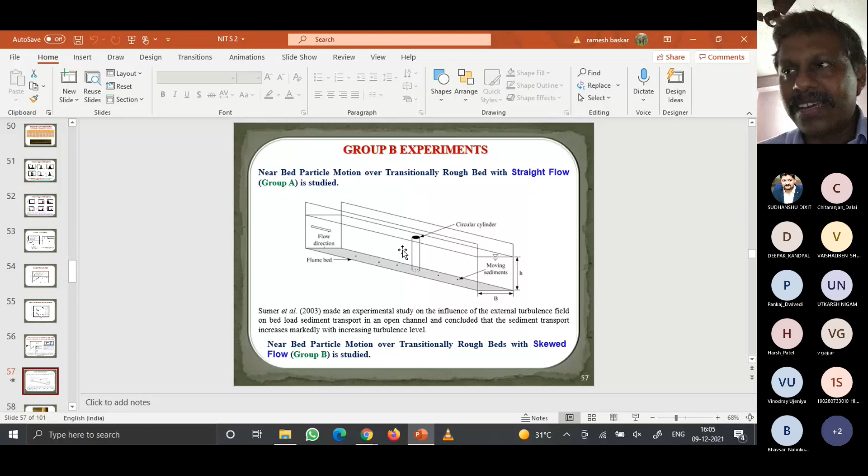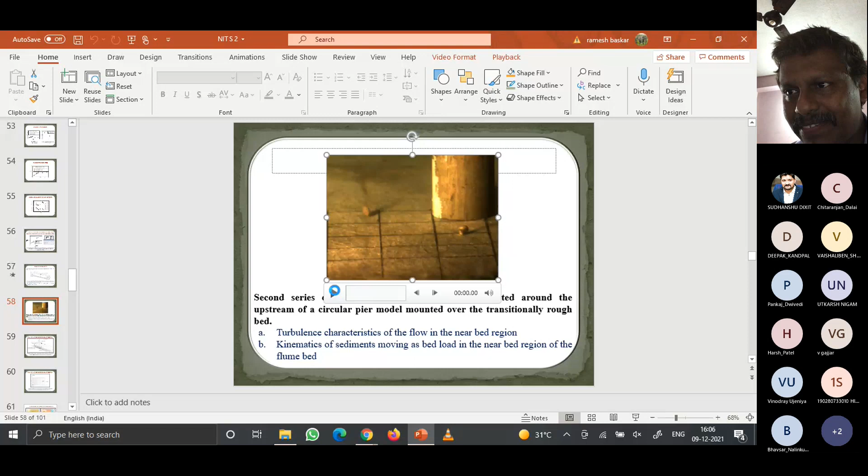So here, this external turbulence, what we did was we had a setup like this, just to show how it happens. Let me play this video. Will it run? Let's wait, and if it runs, okay, good.

Can you see that the particle is moving? Yes, sir, we can see that. Very good. So that was the motion.

You can see here the particle comes with some velocity. Maybe you will not appreciate it, there's a lot of buffering there. Otherwise, you could see that the particle comes with a velocity, and when it comes closer to the pier, the velocity increases tremendously, and it moves with much faster velocity.

That was basically what our studies were all about. So what we did was, around this pier, we tried to understand and quantify the turbulence that was generated because of this external object in between the flow. And that turbulence we tried to relate with the sediment motion, like what we did previously.

But when you come to this study, two-dimensional analysis will no longer work, and you'll see that once we go through the flow, you'll understand what we did.

Okay, so this was the setup we had. The diagram is like this: I have the flow, and in between I had a pier, and on the upstream side of the pier, all the flow that is changing there was measured. You could see a grid line there, which we put there and identified.

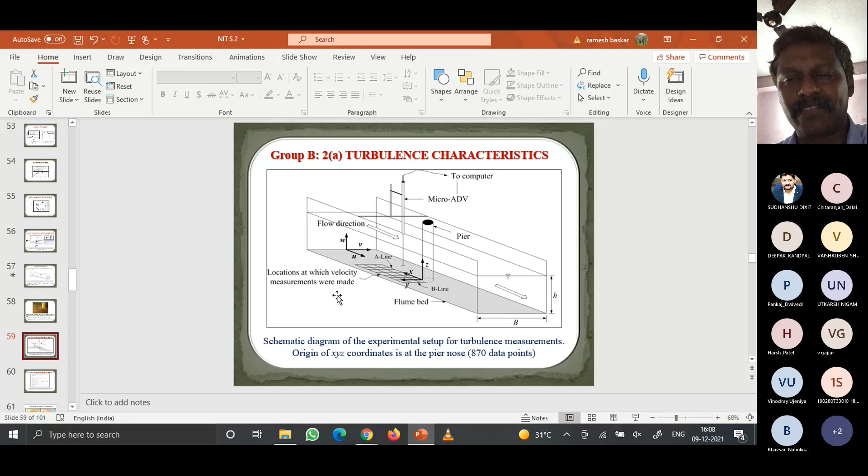And as usual, a camera was used to find out the sediment characteristics, and we try to relate both of that and get a relation. That was the objective of the study.

So you see, these many points we had. These were the points where the flow velocities were measured. You see, these many locations we had. All these points were the locations where we measured the flow.

And you can see here, our measurement points were very dense, very close to the pier. When you get away from the pier, we have increased the spacing, because we know that the effect of turbulence in the upstream side reduces when we go away from the pier.

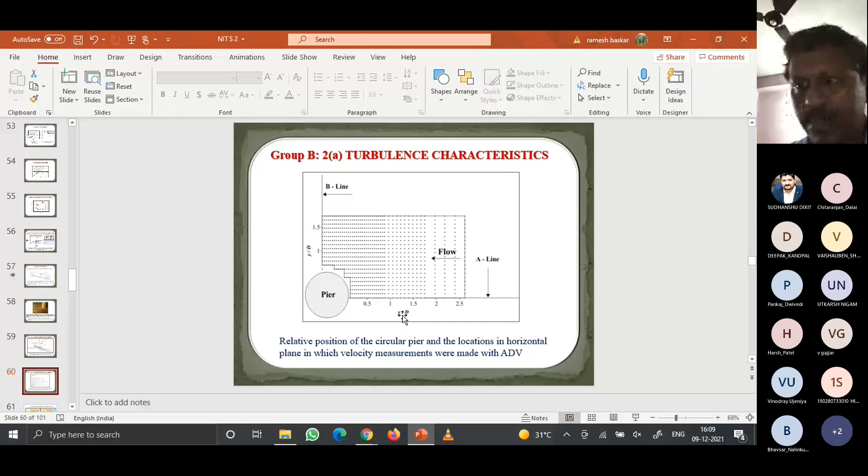So that is the reason, and these many points we have measured. At each and every point, 30 hertz was used and we got 7,200 data points. The complete data points were processed to understand a map like this. And we got a very interesting map here, and you could see how the flow velocity changes. Because of these many points, it was pretty easy for us to quantify where exactly the flow changes happen.

And you can see here the components of the velocity in x direction and y direction, and these u and v velocities were clearly captured. This is all from the ADV data what we got, and all that data was processed and used for preparing this contour map.

And these were the velocity changes, and you can see very close to the pier, these diagrams were not possible. The data is not given, it is blank. Why? Because that was the limitation of the ADV. We could not go closer to the pier more than that. That was the maximum possibility with the ADV what we had. We tried a lot of tilted orientations, and that was pretty decent data which we could get near the pier.

And you can see the velocity vector, how it comes and how it is getting diverted, and that is a very crucial area here, very close to the pier. It is very crucial, and we tried to understand that, but unfortunately very close to it we couldn't get data, but it was okay.

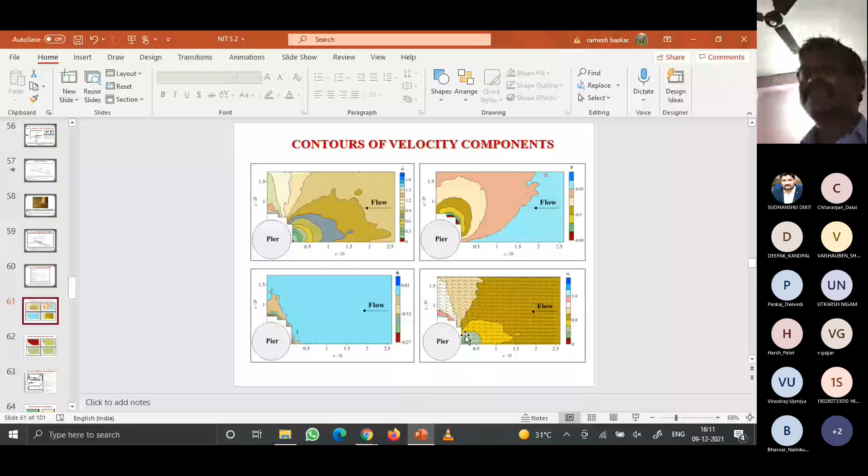And as we did previously, we measured the velocity values, and from the instantaneous velocity values, these turbulent intensities were found out. And you can see how the turbulent intensities vary close to the pier. And really, you don't have to bother about more than the size of the diameter of the pier. And that's what our previous literature also says, right?

And on the upstream side of the pier, you can see that it is not more than the diameter of the pier. It's less than that. All these effects will be felt within that. So whenever we have a study, we can have it just one time, or 1.5 times at most, because all these variations will happen within that.

And the flow along the symmetry line. What I mean is this mid point here. This is the line at which the flow gets diverted. So here, at the center line, the flow comes and hits here. That I call a symmetry line. And after that, the flow gets diverted to the right side and left side, right?

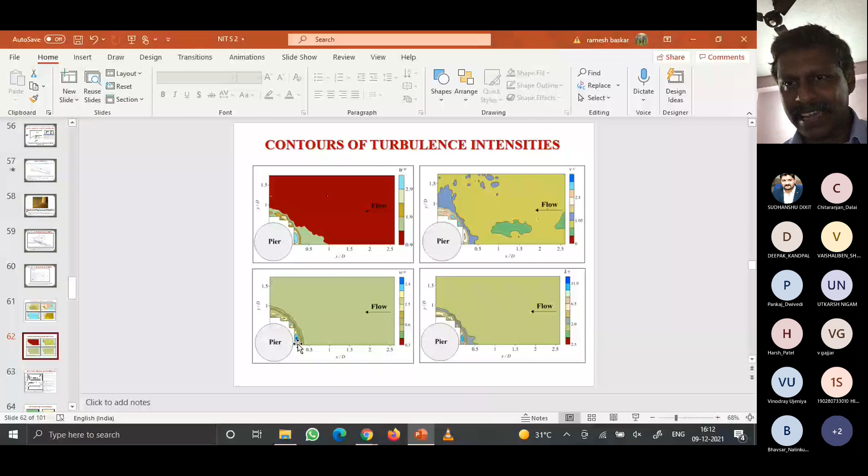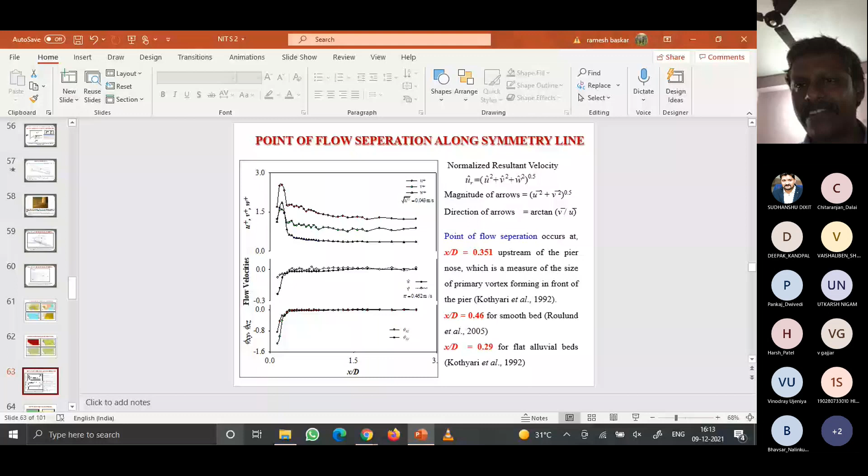And we have drawn this, and we can see how beautifully the flow is varying. You can see the turbulent intensities are very high closer to the pier, as expected. There's nothing particular about it, but it really quantified the maximum turbulence level very close to the pier, and how it drastically drops down. And with these values, we can draw the Reynolds stresses also, as computed previously.

The Reynolds stresses and all these variations you can see are pretty close to the pier only. We have all these turbulence effects there, and upstream you don't have much effect. So the point to be emphasized here is that all this turbulence really has an effect on the bed load. When this turbulence is not accounted for in our predictions or whatever formulas we use, then it may not give you the correct answer.

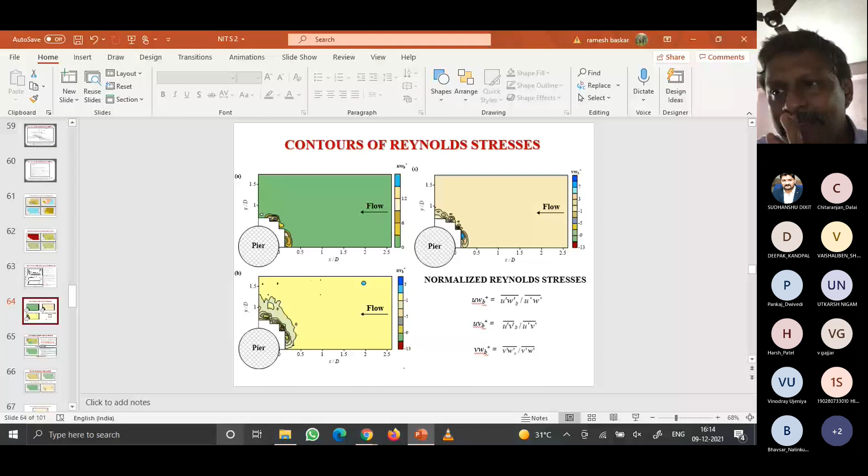So that's the quantification from this diagram, and you can see the variation of the bed shear stress. Two formulas which we very commonly use in the literature were also used to find out what the bed shear stress will be based on the values. These are all post-processed values, right? With these U and V values, all these things are post-processed, and we got a graph.

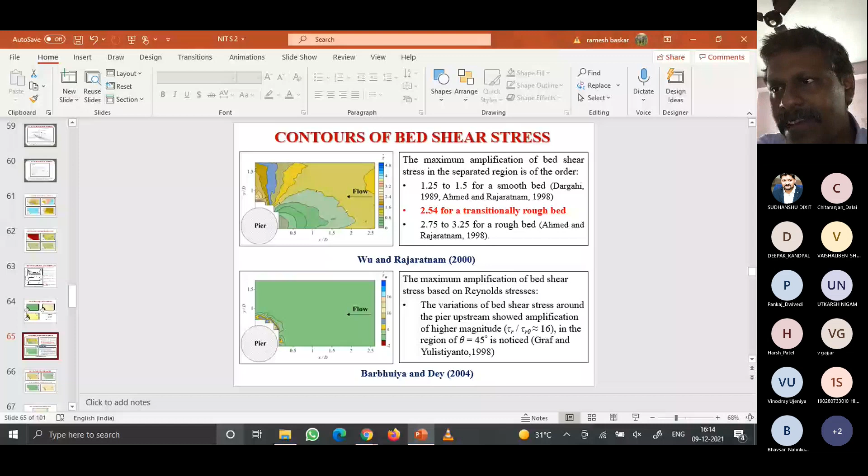So again, as usual in the straight flow, we got the diffusion factor. These are all the same as before: flatness factor, kurtosis, and we also had quadrant analysis. We got interesting diagrams, very close to the pier. It's all about U', V', and W', right? Those were used to do the quadrant analysis, and based on that, we saw that there's a lot happening close to the pier. We could quantify all the turbulence happening there to a reasonably good extent.

And after that, what happened? Hold on for a minute. Big images are coming up, so give me a minute. Hope you can see me. Can you see the slide? Yes, sir, we can see the slide. Thank you.

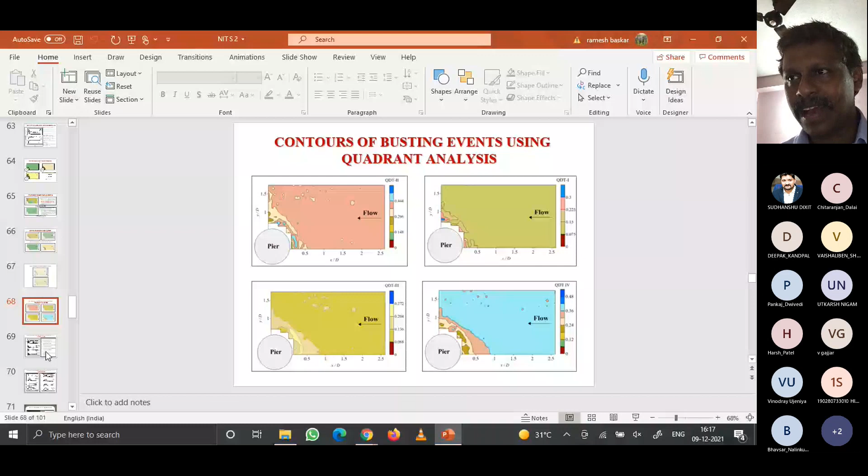So this was the quadrant analysis. Through the quadrant analysis we got the flatness factors and the kurtosis. All these parameters were computed very close, because they all try to define the turbulence. The turbulence we were trying to understand was computed along line A and line B. Line A is the symmetry line, exactly on the upstream side of the pier, and line B is across it, at 90 degrees, and we show the variation of all these parameters along these lines, because that was where we were focusing. When it gets away from the line, it dilutes down, so we tried to quantify it along that line.

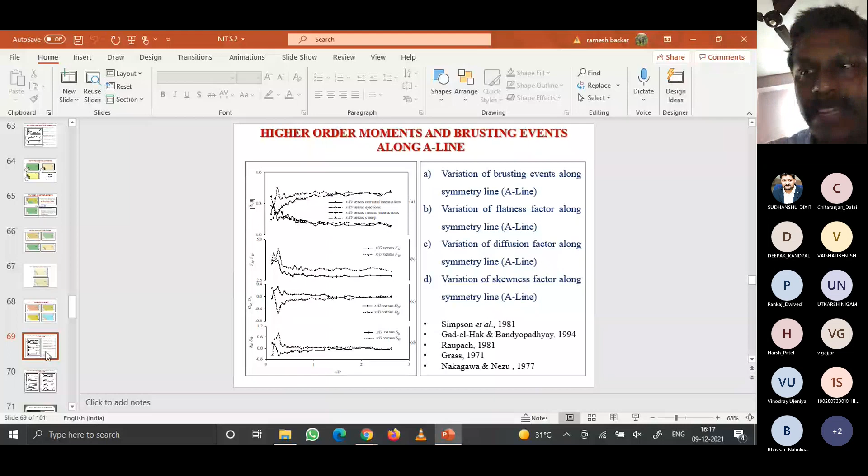And all these parameters shown in the contour maps, by post-processing the contour maps, we can get the velocities and other parameters at any point of interest. If you drop some points there, we can understand the flow parameters. Each and every point very close to the upstream side of the pier was mapped. So at any point, the turbulence event, the turbulent intensity, the kinematic viscosity, the turbulent kinetic energy can be found directly from these contour maps. Whatever we had on the upstream side of the pier was clearly quantified, and the data we got is very clear about the flow happening there.

Now we go to the camera part, that is, the image processing part. Here is an interesting setup we had for image capturing. Previously it was two-dimensional only; we had a camera only on the side of the flume, capturing the sediment motion from one side. But at the pier, it is no longer two-dimensional; three-dimensional effects also happen there, so we cannot capture it with one single camera. So we used two cameras: one capturing from the side, and the other from the top.

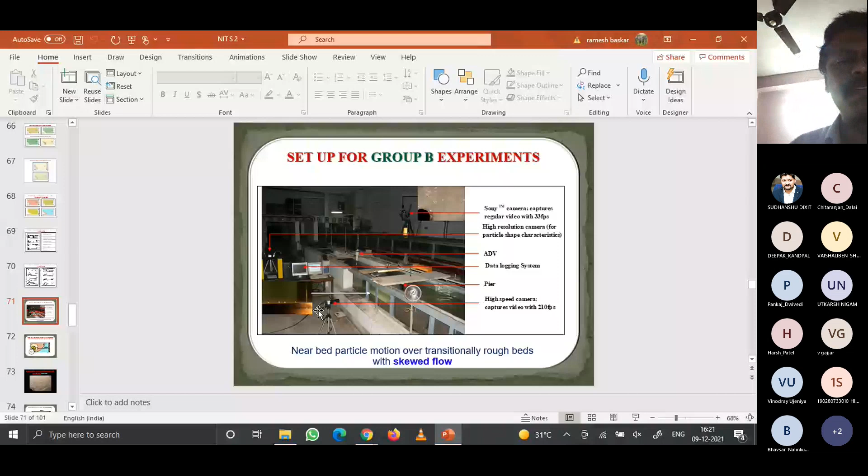It takes close to 33 frames per second. That is a regular camera. So that regular camera captures the sediment motion from the top. How a sediment moves, only that path can be tracked. It was manual tracking, so we did not have a high-speed camera on the top. So these two were the camera setups we had, and with that camera setup, we tried to track a particle.

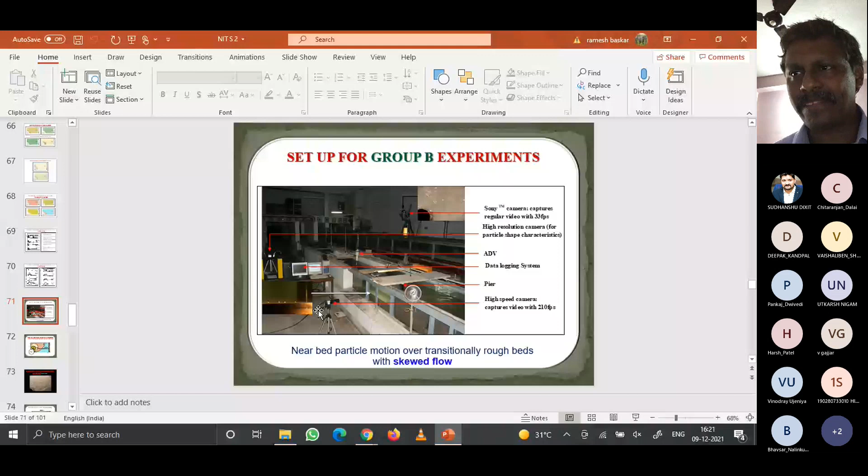You see, what we did here was, we know the complete flow profile, and I dropped a sediment on the upstream side. Well ahead, we dropped a sediment which was close to the symmetry line. It was not passing exactly the way I wanted, but it was going, right? So I dropped a particle on the upstream side, and the path of this particle was tracked using the data from the camera on the top, which clearly captured the track of the particle.

After that, this track was superimposed over the contour maps we had already drawn of all the turbulent characteristics. Then we got the data along this track: what were the turbulent characteristics. Now we have the velocity with which the sediment is moving, and exactly what the flow parameters were along this path.

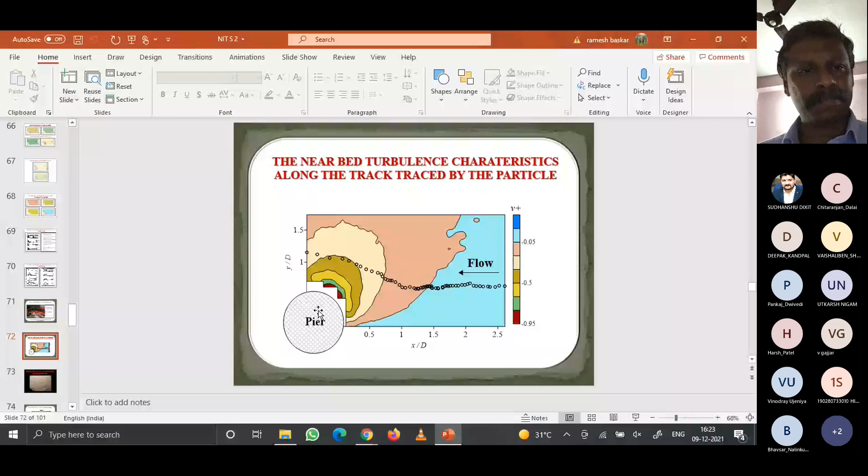Then we tried to relate both, to understand when the turbulence increases, how the velocity changes, right? This relation was clearly found out by this method. So we'll see how we did this. This image was taken from the top. Let us see whether it works.

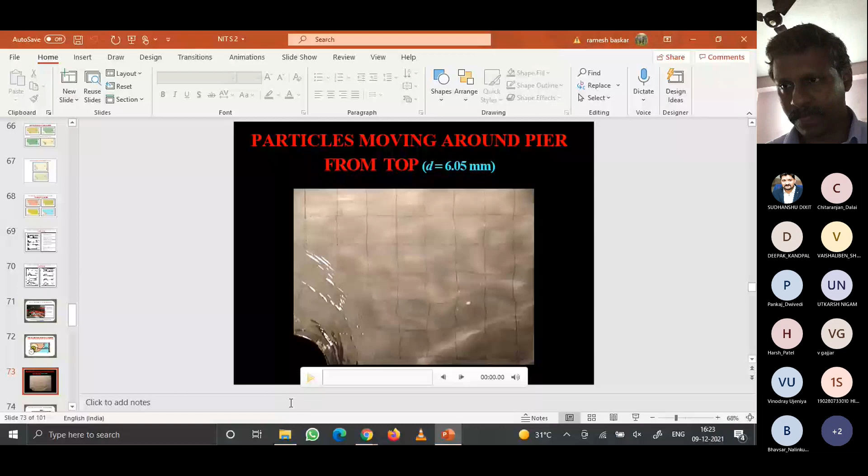It's working for me. Can you see that? Yes, sir. Yes, sir. Thank you, thank you. And you see this, these all

particles are moving. Can you see the colored particles moving? Yes, sir. Red, yellow. A little bit. How many colors do you see? Okay. I have used a variety of colors: blue, red, yellow. There is no specific hydraulic purpose behind that, and I have used 3 or 4 colors there.

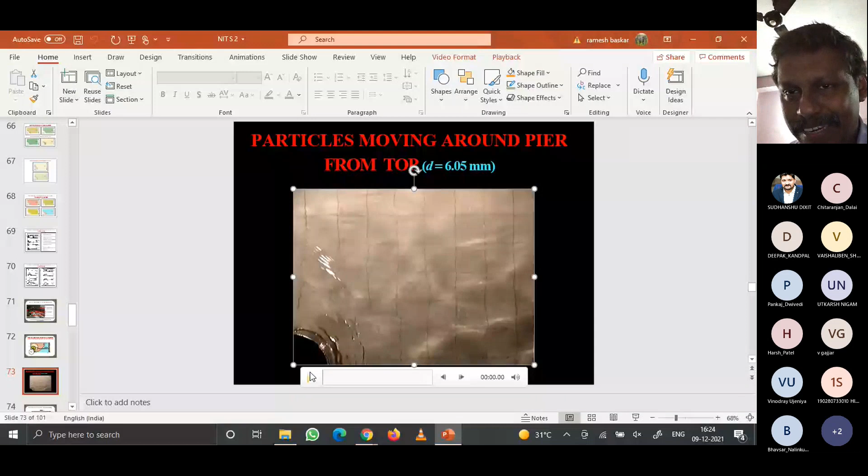Why I used this: when I drop a group of particles on the upstream side, I really want to know which particle I am tracking, because it's manual identification and tracking. So I was putting 4 or 5 colored particles there. Once I track the yellow sediment, I'll follow that. That was the idea of having the colors, otherwise no particular reason for the color code.

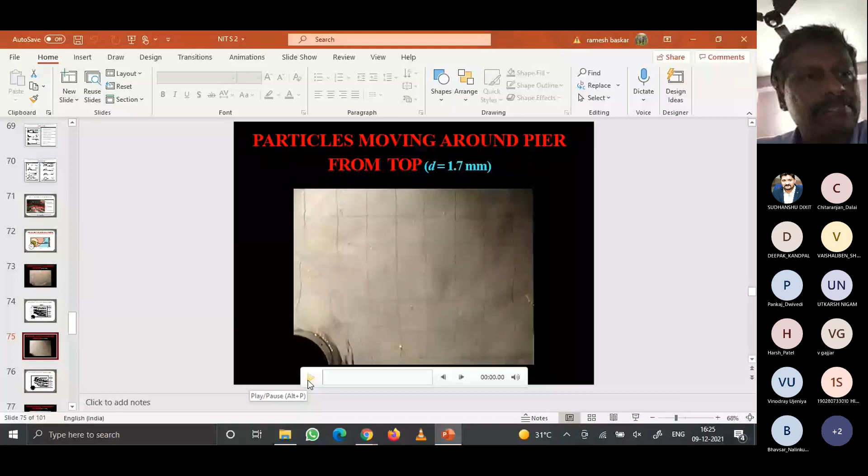All these were traced from the top, and particles of different sizes were used, because we have seen that the 7.15 particle was rolling, the 6 point something was also rolling, and the 4 point and 1.7 were saltating. So how a saltating particle behaves in turbulence, and how a rolling particle behaves in turbulence, we can really quantify. That is why we fixed the same sizes here.

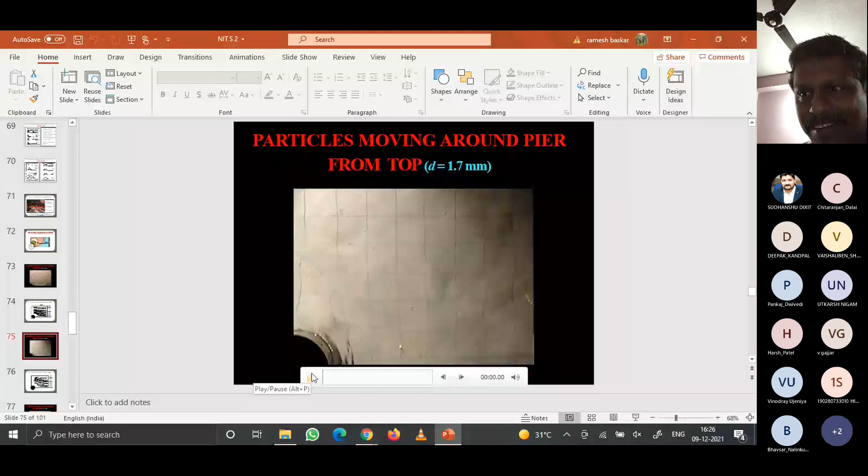And these were some other images. I'm very sure you could not see them because of the buffering; they are very small particles, the 1.7 particles. That was also tracked. Only sample tracks are shown here for presentation purposes. If you ask me the numbers, it was running to hundreds of tracks.

Close to 700 plus tracks were traced for each particle, so that we can really understand whether any effects are there. Dropping issues and all that can be averaged out. That is the reason we did a number of tracks. With all that track data, we could quantify the paths traced by the particles. This was another 7.15 mm particle.

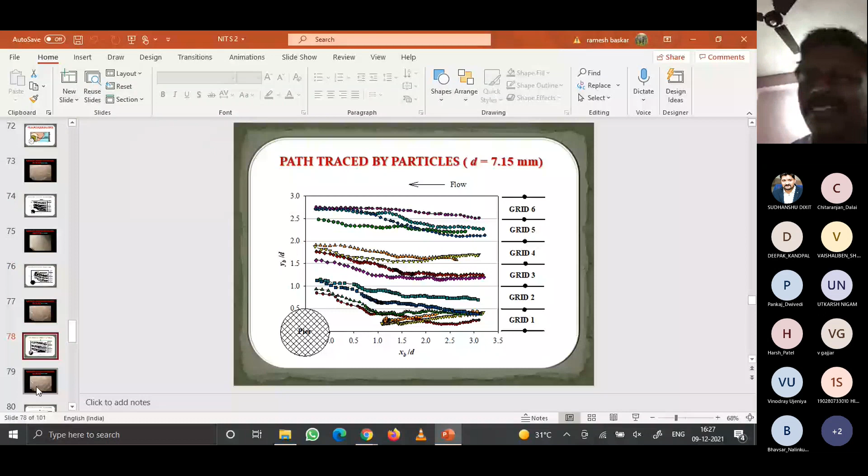And you see 7.15 mm is pretty heavier. And you can see that the skewness is not much there. Skewness is there, but when you compare with this, there are a lot of changes pretty close to the pier. But here it is all there, but not that. So that also was traced, was found out, and 4.05 mm particle.

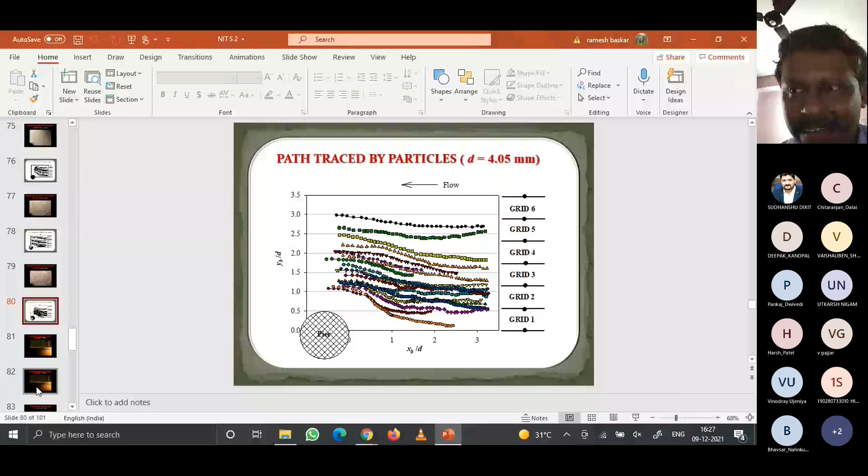Then those all tracks were from the camera that captured from the top. We know how the particles are moving very close to the pier, right? Now what we did was we had a camera from the side, so that was also capturing. We could see that. Just make a try.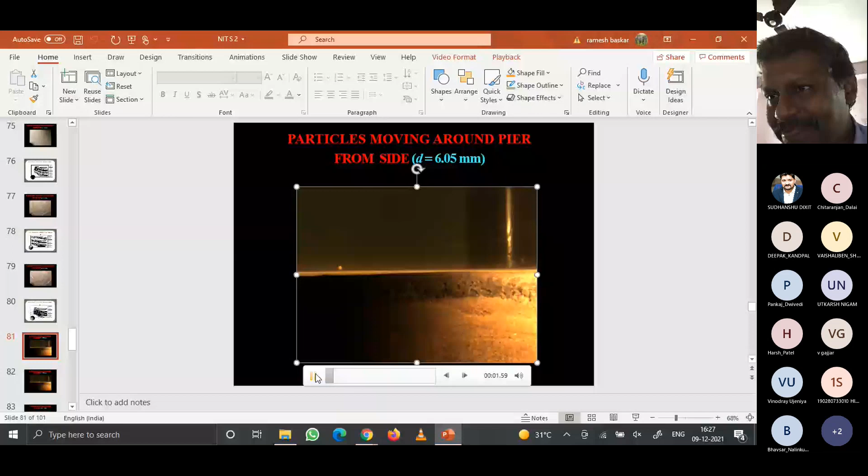Can you see? Yes, sir. Yes, very good.

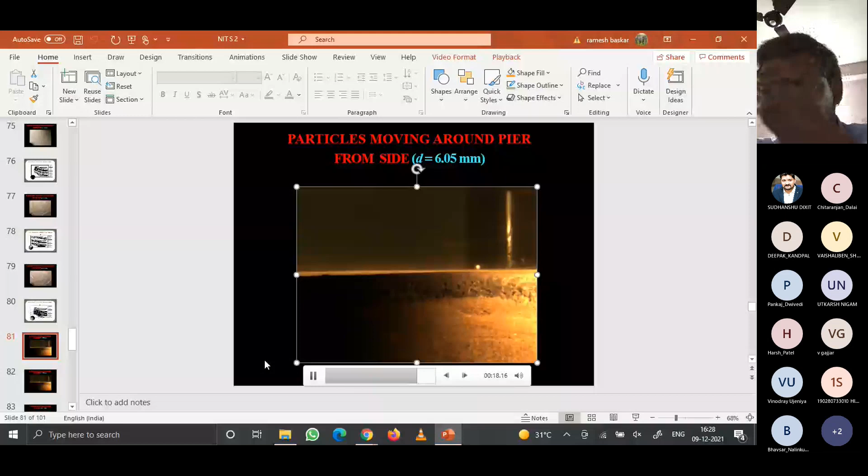So these are the particles that were moving from the side. That was completely captured using the cameras from the side. So this data from the side was used for computing the velocity data about the sediments. The top data was used to identify the tracks it was following, and from the side we used the camera to find out the velocity of the tracks that it was tracing.

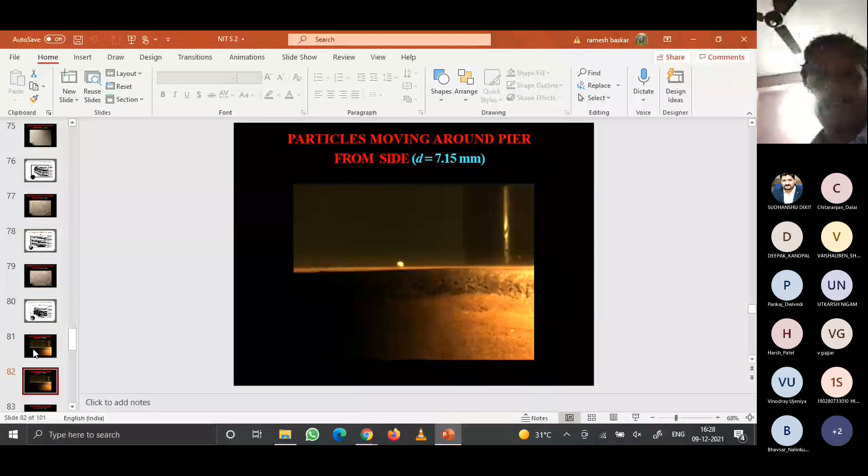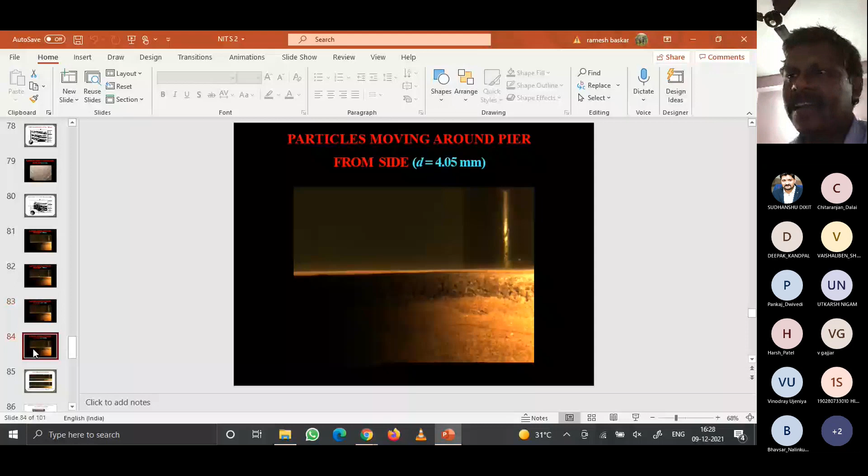And it was also again done for different sizes and shapes of the sediments. As usual, 7.15, 6.05, 4.05, all were done. And this particle tracing was also done. You see how the particle moves, it's saltation, and you can see beautiful saltations. Previously, it was in rolling regime or close to rolling regime. When it comes closer to the pier, it starts saltating.

So, do you see that? Previously, it was rolling very close to the pier. Yes, sir.

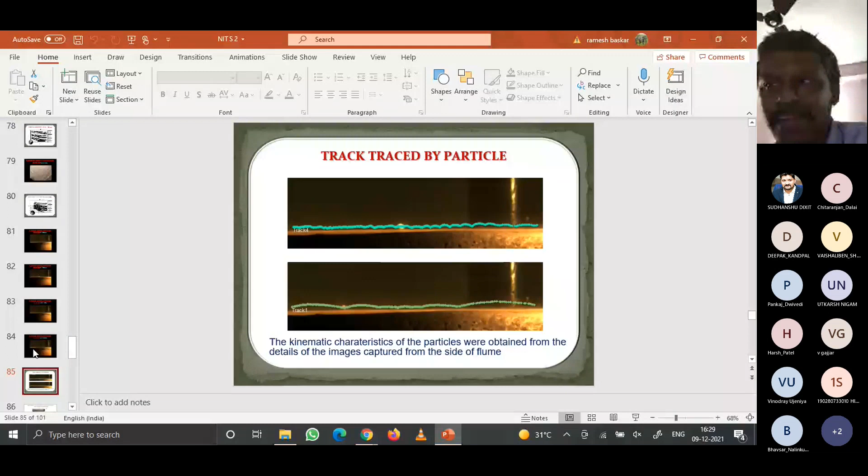So it is all saltation that is happening just because of this extra turbulence that is created. In an ordinary, regular case, it should not saltate, it should roll, but because of this extra turbulence, it's saltating. So we tried to quantify that also. And this was the procedure that was adopted in particle tracking.

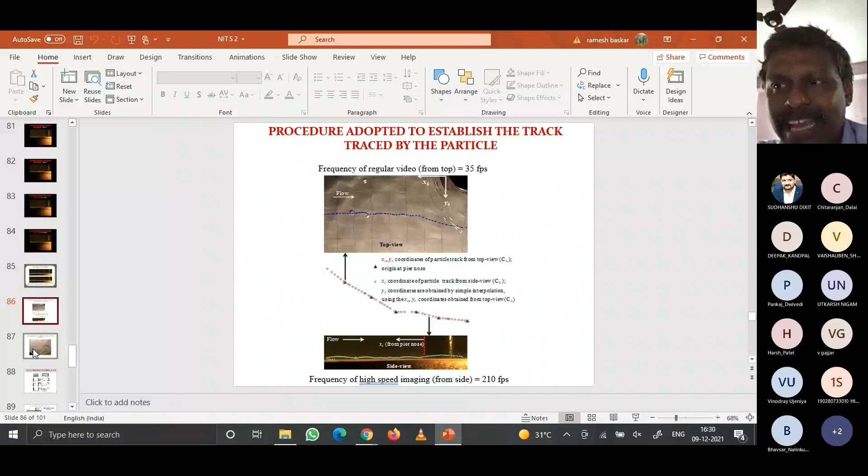From the top video, we had 35 frames per second, and that was used to get the track. And for each and every track, we got it from the side. We found out the velocity with which the particle was moving. You can see here the angle of deviation, how much it is changing. All that could be easily computed by image processing techniques. We used many techniques there, and using that we can find out how much it is getting deviated.

Because when the velocity vector changes, we can do the computation based on the angle, and those corrections were also applied. Why? Because when you track the object from the side, there is some missing data, because you are taking it two-dimensional. If it is a straight line, there will not be an issue. When it is turning at an angle, that angle has to be resolved. So the resolution of velocity vectors was done so that the errors were minimized.

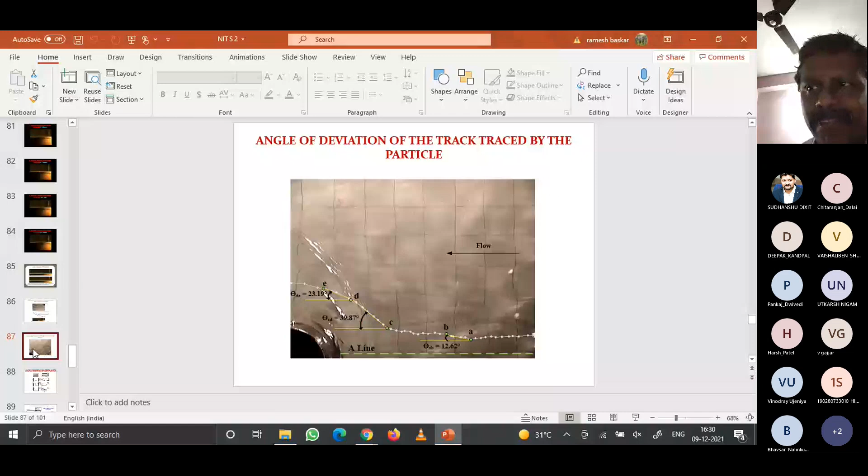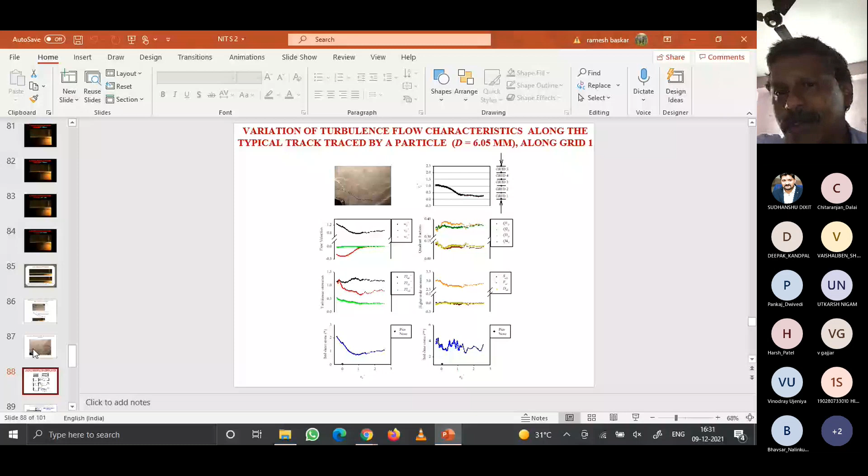And you could see these were the beautiful graphs, the beautiful values which we got. Along the track, from the contour maps, we tried to extract all these data, and the velocity data we got from the camera, and we tried to relate both, and then understand what the relationship was between them.

So with this data, what we have done is add a correction coefficient. When you talk about turbulence, what is the turbulence level, the turbulent kinetic energy, in that area? Take that value. That can be found out very easily by any ADV or something. Find out that extra turbulence, find a correction coefficient, and add it into the previous equation, so that we will have a correction.

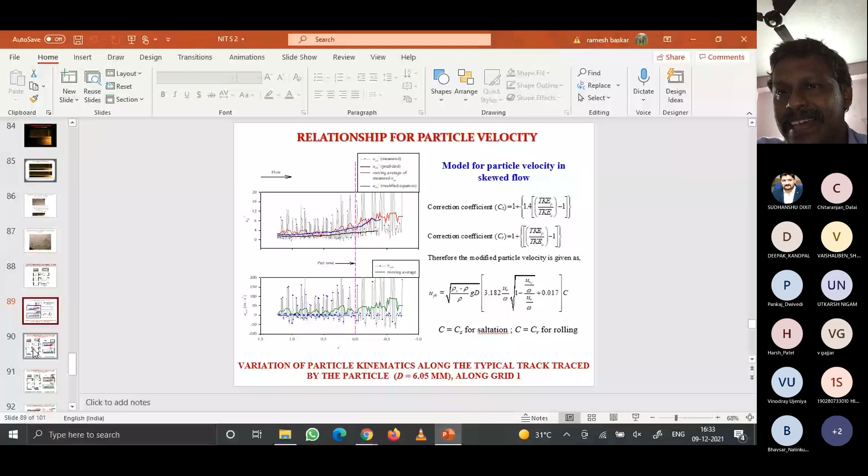So this was some other sizes. All these sizes were taken into account, and many of these diagrams were meticulously analyzed. You see, all this, it's not a single track answer. We did the same thing for multiple tracks, close to 1,000. And if you ask me the data points, it was crossing crores, because at each and every point it was 7,200 data, that multiplied by 350 points, and that much of value.

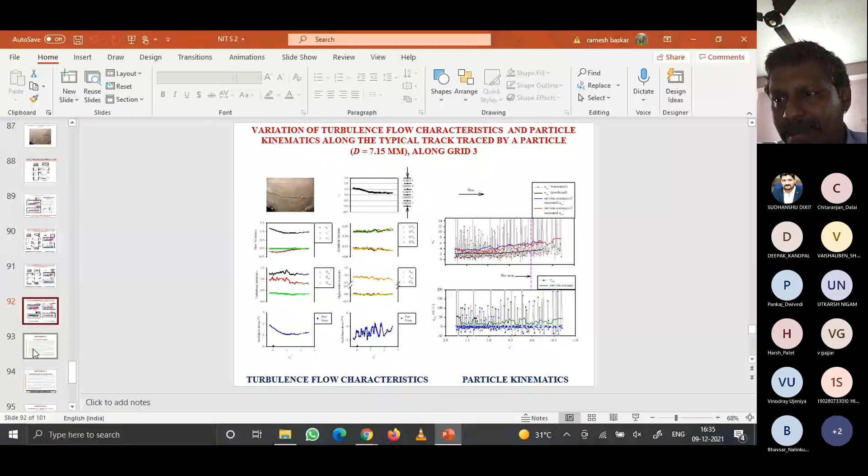And if you track high speed images, each and every image you will have some 3,000 to 4,000 photographs that have to be evaluated. So it was like full data. The data processing was done really meticulously, so that we get these values. So based on all these track values and what we got, we concluded this equation. And these are some more tracks, the variation of the flow characteristics on a typical track traced by a particle, and that was also compared.

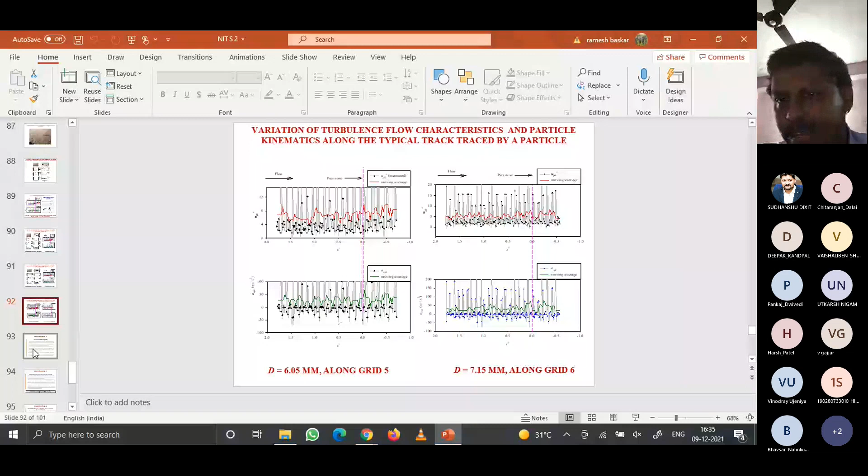So based on that, we make the following conclusions. A very detailed study was done, and based on this study we can really find out that when the bed is transitionally rough, then definitely we can use this equation without extra turbulence. If you don't have any extra turbulence, use the first equation and you compute what will be the value there. And if you have any extra turbulence, use the second equation with the proper correction factor. That will be based on the turbulence level in that area. So based on that, we can make a computation there.

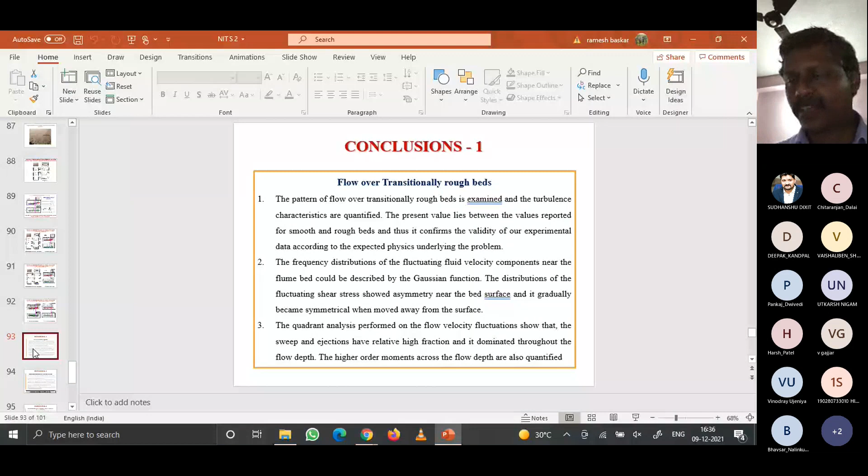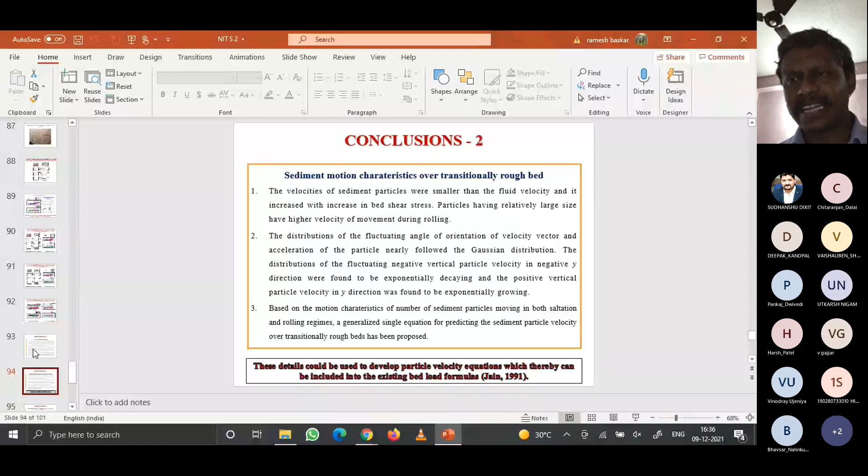And these were some of the conclusions which we could get from this. It's all very detailed conclusions, how much it is changing, why it is changing, at which point these changes happen, and which was the point till which the turbulence happens. And you see, when we try to quantify these higher order moments and coherent structures using quadrant analysis around the pier, we saw high values, greater than 3, in the flow separation region. In the flow separation region it was very high, and that really indicates that the turbulence is highly intermittent in that region.

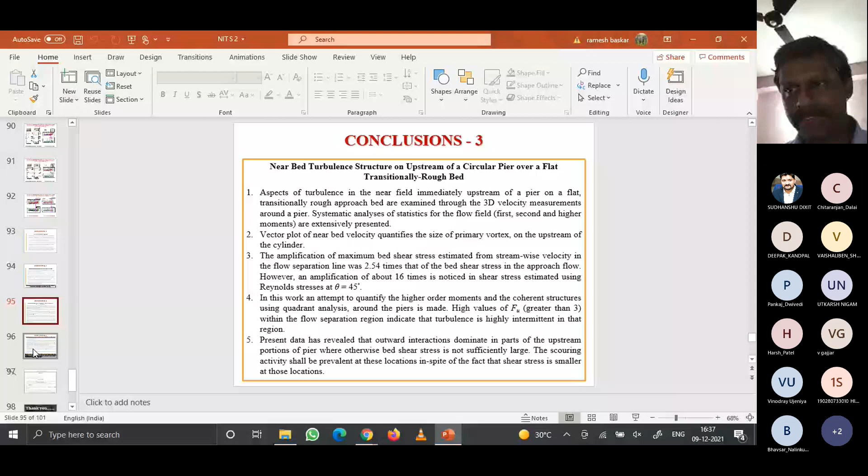So that really tells us more about the turbulence. But a lot more work has to be done to understand the exact turbulence that is happening and how it is linking with this particle motion. And these were the conclusions which we could make.

And I should really tell that all this work is the brainchild of my supervisor, Dr. U.C. Kothyari, and he was a great legendary man in this field of sediment transport. And it was his idea to try to understand the influence of turbulence, because from the beginning he was saying these bed load transport equations should include turbulence also. So we should quantify turbulence.

So this was one such attempt that was made to understand the turbulence and its influence, and we could quantify it to some extent. A lot more work should be done in this field of sediment transport and turbulence, so that we can understand things better. And that's what I have in my presentation today.

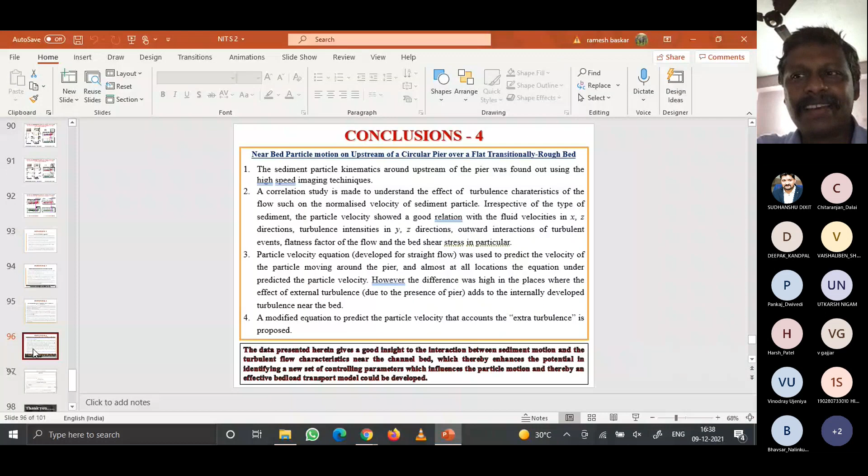Sir, I have one question. Can I ask? Yes, please go ahead. Sir, during the presentation, you said due to the limitation of ADV, we can't identify the contours near the pier. So, is there any instrument at present that can eliminate this limitation? Non-contact velocity measuring devices, maybe laser. PIV could be used, but our flow was very huge, and I don't know whether PIV is used only for very small applications. But non-contact measurements, whatever you have, I guess can be used for that. Okay, sir. Thank you.